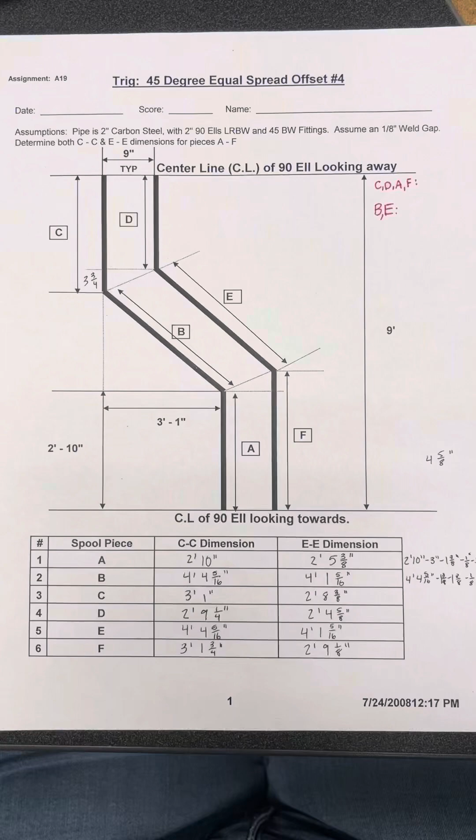All right, so I'm going to show you how to do a 45-degree equal spread offset. We're going to calculate this center to center, and then we're also going to calculate it end to end. So first of all, starting with the 45-degree offset, basically they're saying that the angle that we are moving from our vertical pipe to this diagonal pipe is 45 degrees.

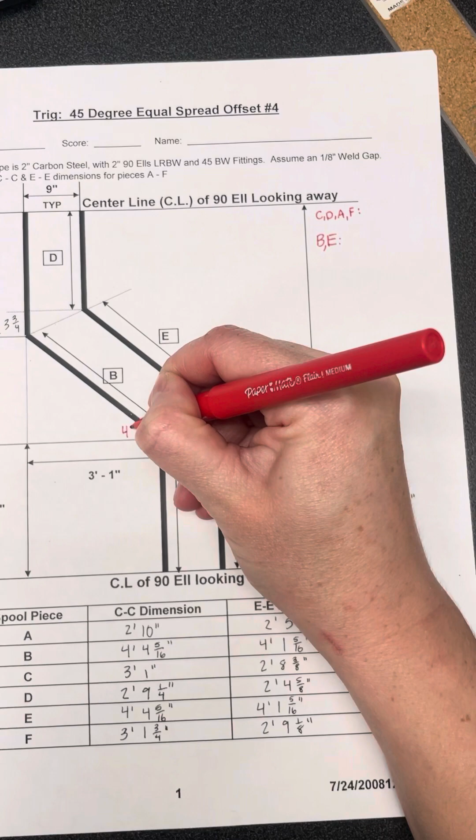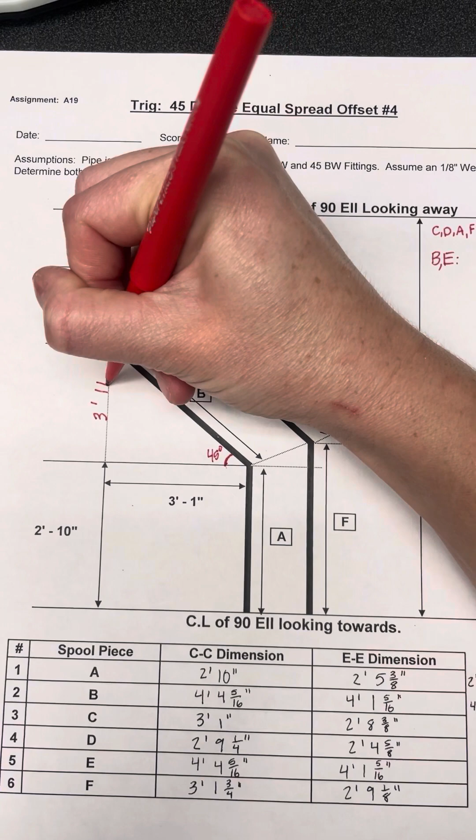Now, what's special about the 45-degree triangle is that the offset and the run are the same distance. So since I have a run here of 3 feet 1 inch, my offset is also going to be 3 feet 1 inch.

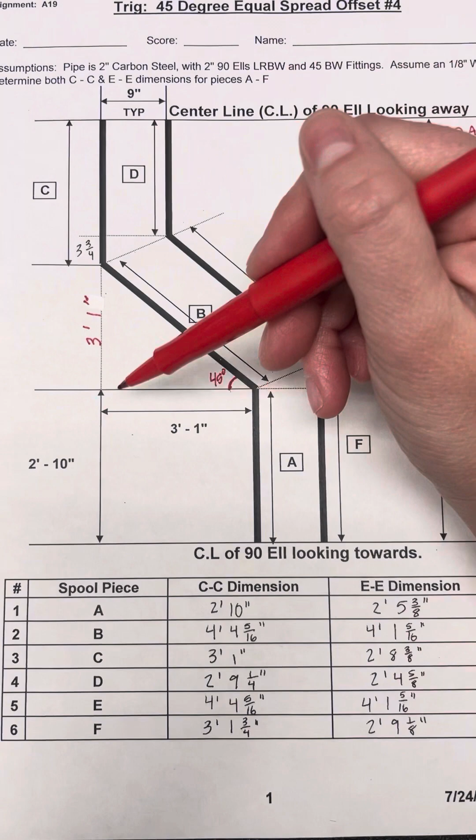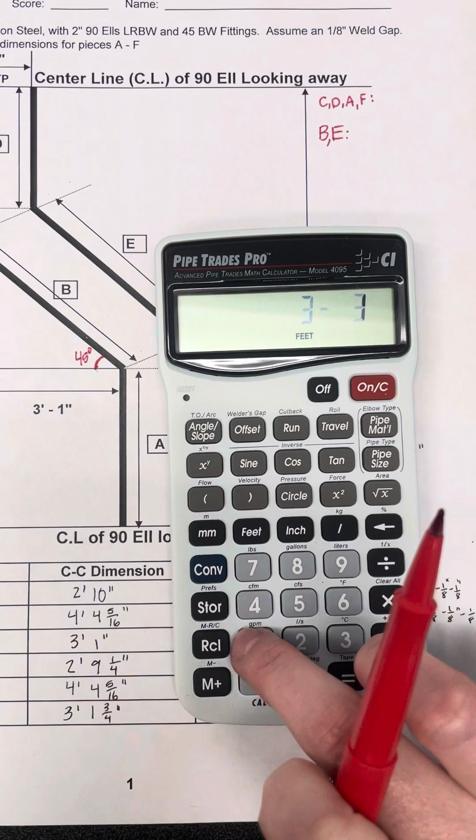Now there's actually three ways we could do this. Because we have so much information, we could use Pythagorean theorem to solve for this missing side. So I could just do this side squared plus this side squared and then take the square root of that sum. So that would look like in my calculator: 3 feet 1 inch squared plus 3 feet 1 inch squared equals, and then take the square root, and we get 4 feet 4 and 5/16 inches.

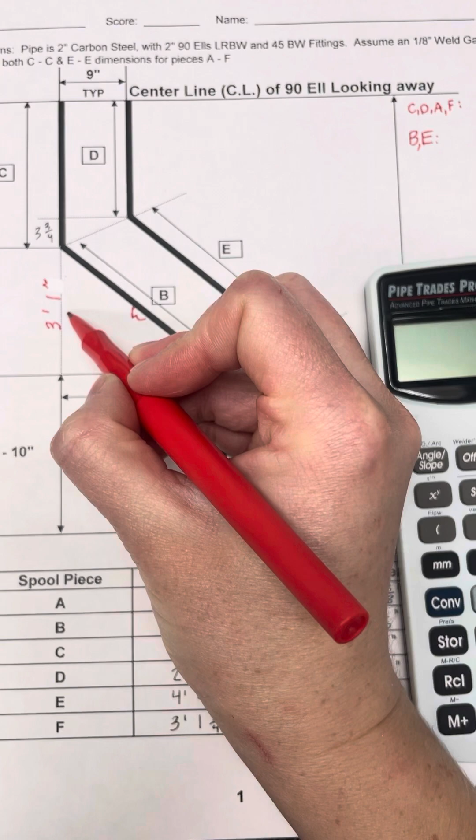Now, another way we could do this is using sine or cosine, solving for the missing side. So this is my hypotenuse. We have both the opposite and the adjacent. So if I wanted to solve for it using sine, I could do the sine...

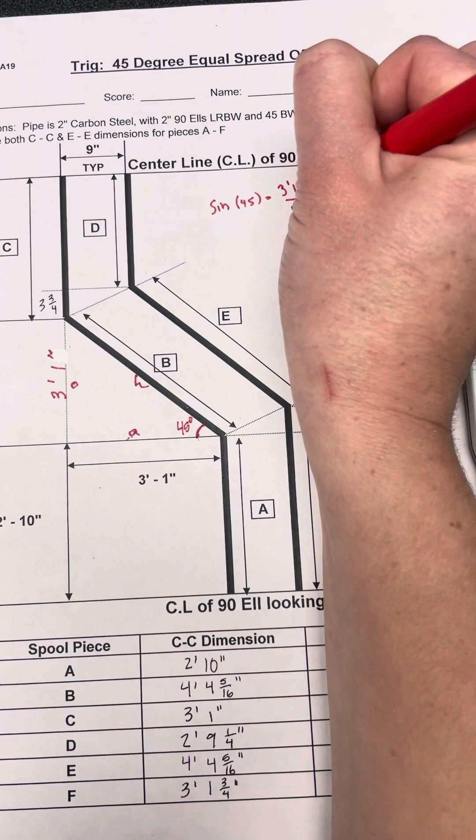of 45 is equal to my opposite, 3 feet 1 inch, divided by the hypotenuse. Now this way is probably a little bit trickier because we do end up with the variable we're trying to solve for on the bottom of the equation. So we end up having to multiply both sides by h.

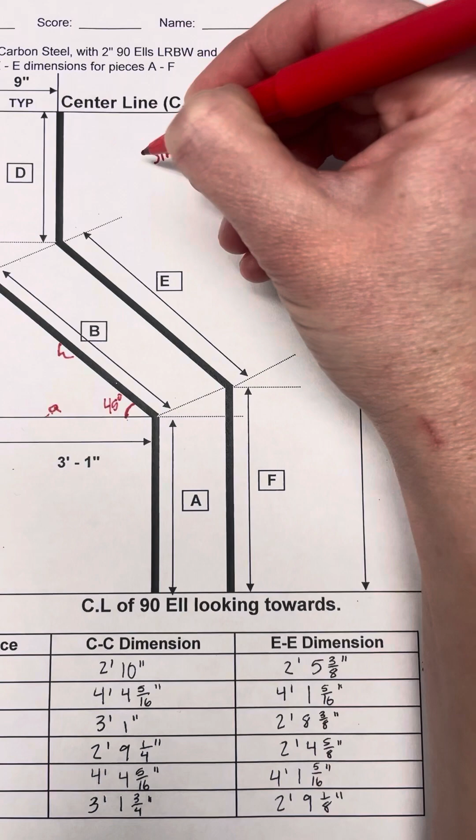And then we get h times the sine of 45 is 3 feet 1 inch. And then we would divide both sides by the sine of 45 in order to get h by itself. And then we end up with h is equal to 3 feet 1 inch divided by the sine of 45.

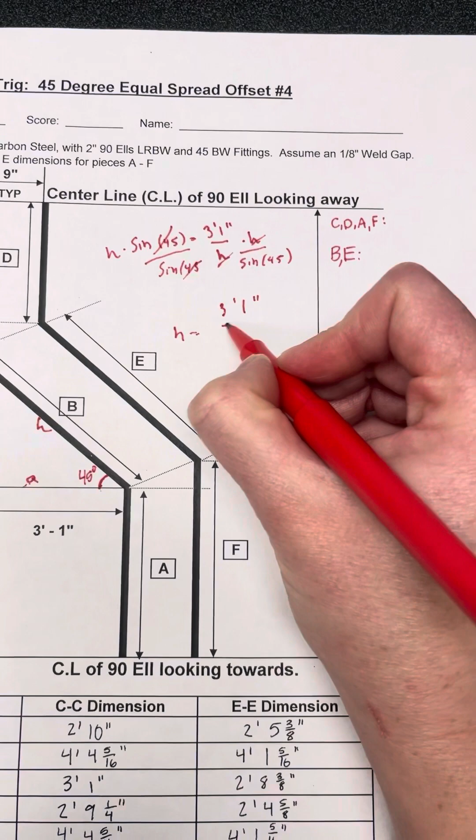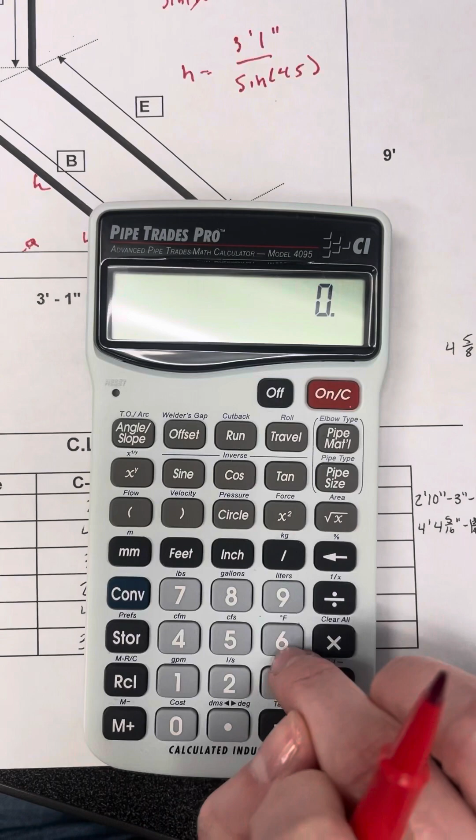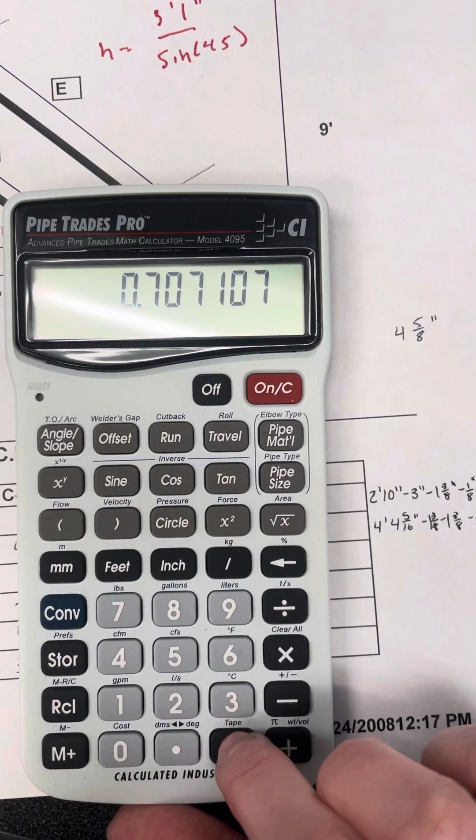Now let's just go ahead, see if that gives us that 4 feet 4 and 5/16. So we're gonna have 3 feet 1 inch divided by the sine of 45. So we're gonna do 45, take the sine of that, the sine of 45 is 0.707, hit equals, and we get that h is equal to 4 feet 4 and 5/16 inches.

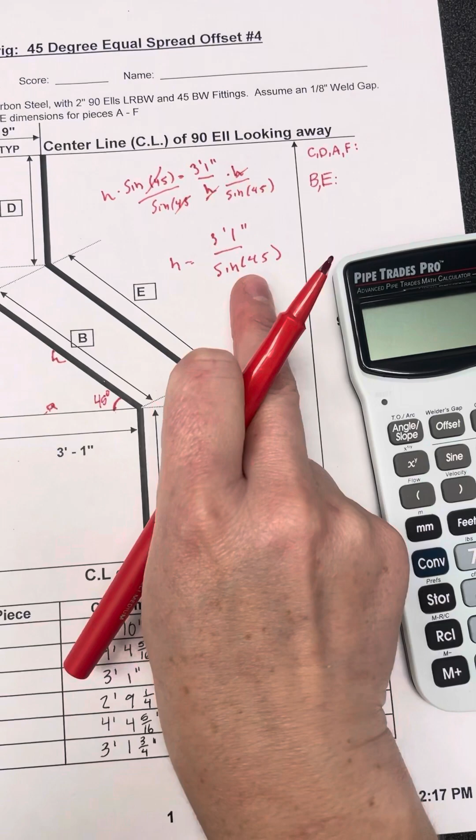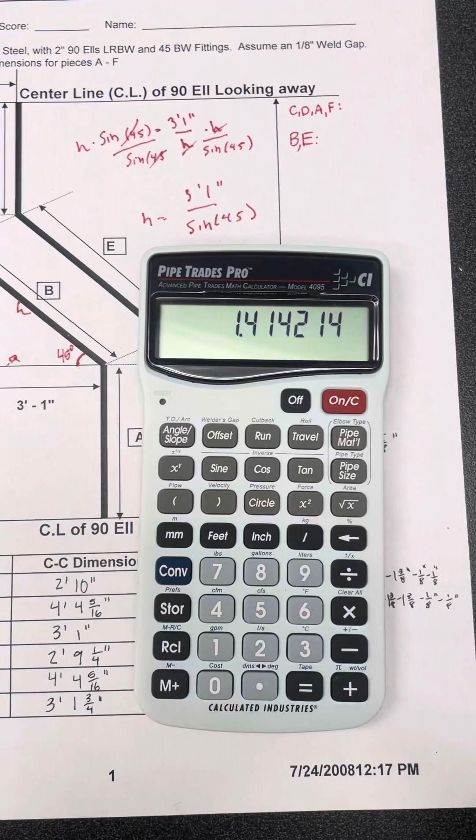Now the easiest way I think to do the equal spread offset is just to use the constant, which is 1.414, and 1.414 really just comes from it's 1 divided by the sine of 45. So if I did 1 divided by 45 sine is equal to, you get 1.414. So that's where that constant comes from.

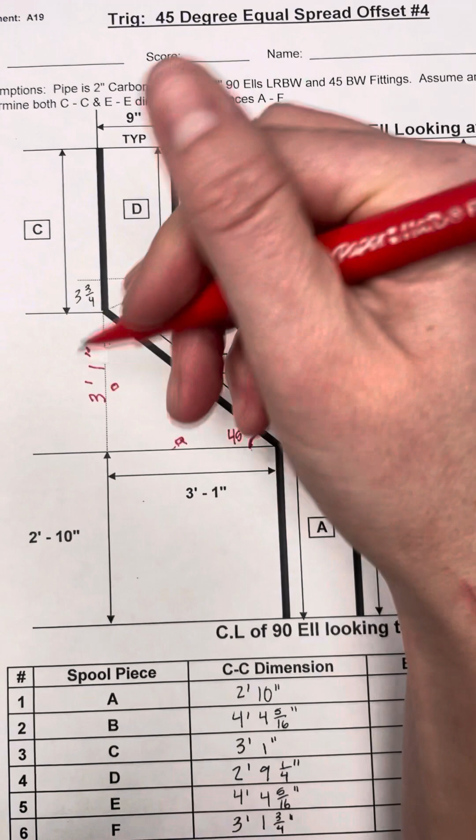But anytime we have a 45-degree triangle and we're trying to solve for the travel, we just multiply the rise or the offset or the run by 1.414. So that's what I'm going to do here. Almost every time I do an equal spread offset, that's how I'm going to solve it, just because it's probably the most efficient way to do it.

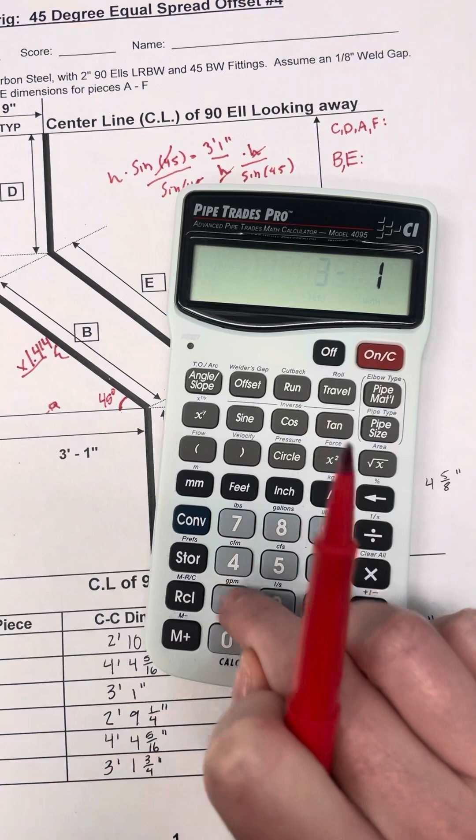So I'm going to do 3 feet 1 inch times 1.414, and we should get the same thing, 4 feet 4 and 5/16 inches. So whichever way you want to solve it, up to you, but 1.414 is generally the go-to when we're doing a 45-degree.

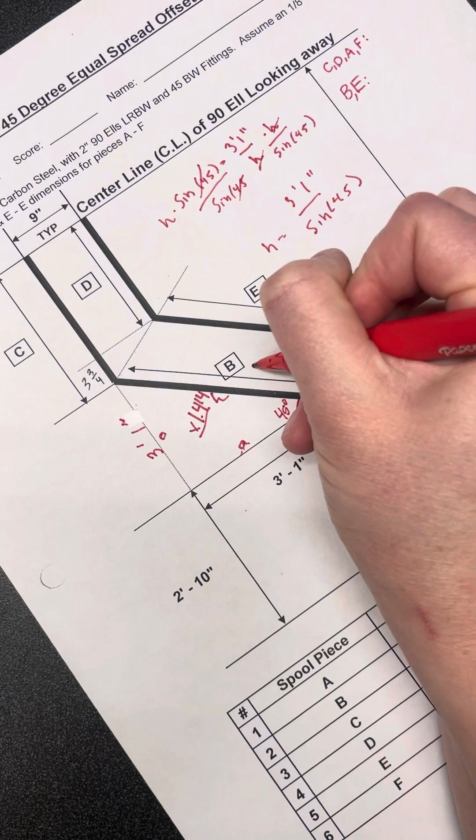All right, now once we have this length right here, this diagonal is 4 feet 4 and 5/16 inches, it's going to be the same for all of our diagonals moving across. So that's the same length for B right here, 4 and 5/16 inches.

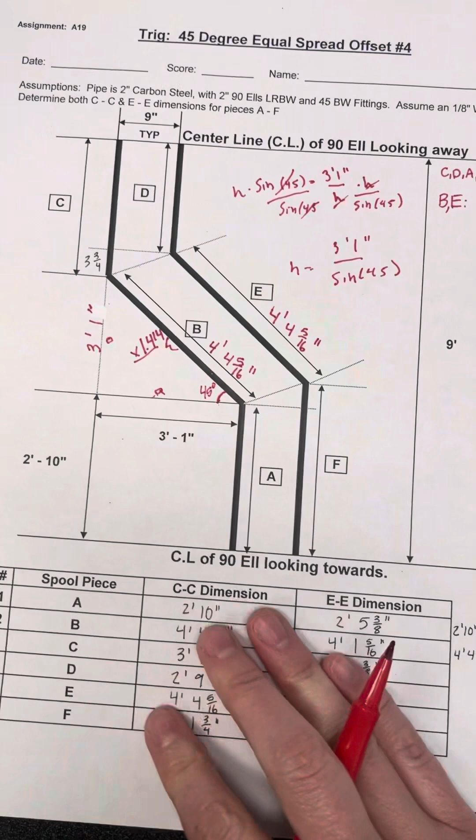All right, join me for part 2 to see how we'll solve for the rest of the measurements.